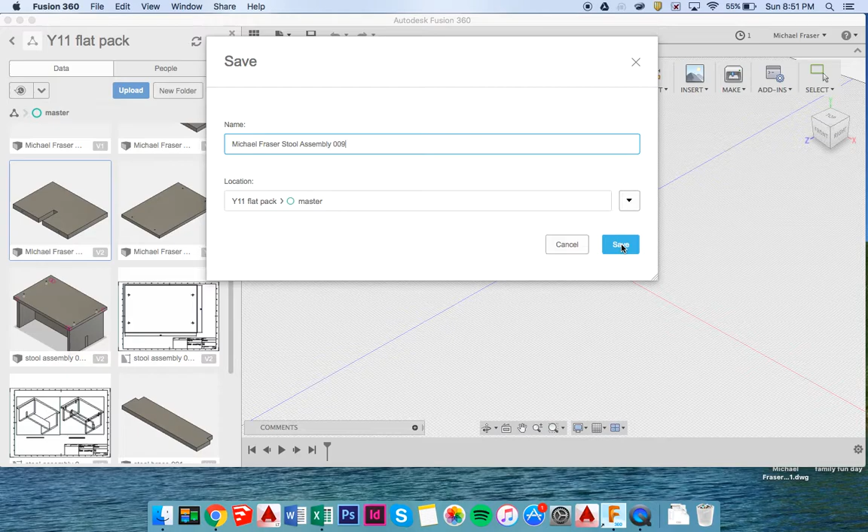I hope you've been using the naming conventions properly, because that's going to make everything a lot easier when we come to our assembly. You'll see I'm up to my 9th go at this. Every time I do it there's a little problem, so it gives you an indication that it's not really straightforward. There's certainly a few little tricks that you need to learn along the way.

So we're going to start by dragging the stool top in, but rather than drag it, we're going to two-finger click and go insert into current design. If you drag it in, it seems to put a lot of load on your computer and on your internet connection as well.

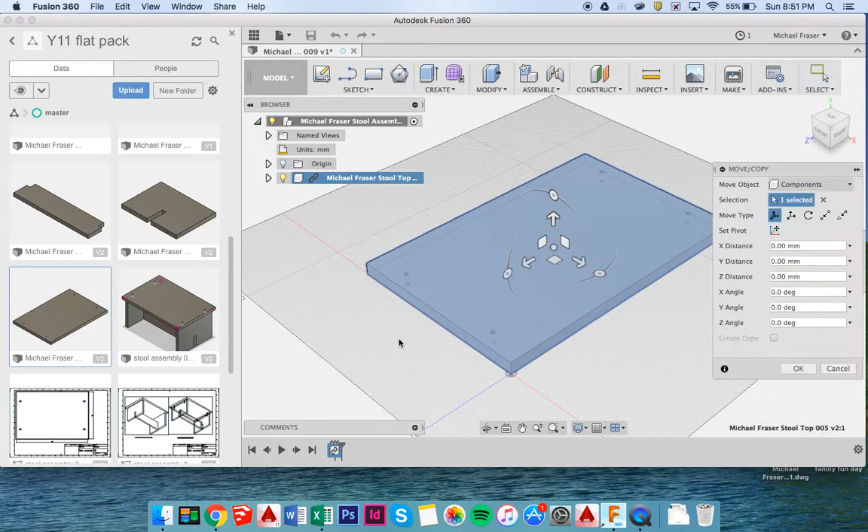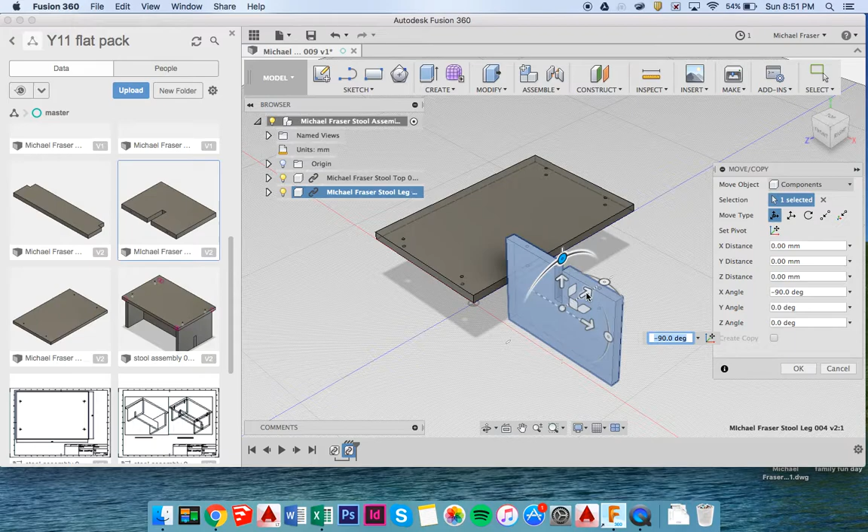So we've got that in there, and now we're going to insert the leg into the drawing as well. And before we try and join those together, we're going to rotate the leg into a better position. Need a good spacing between those drawings because we need to be able to see in there before we make the joint.

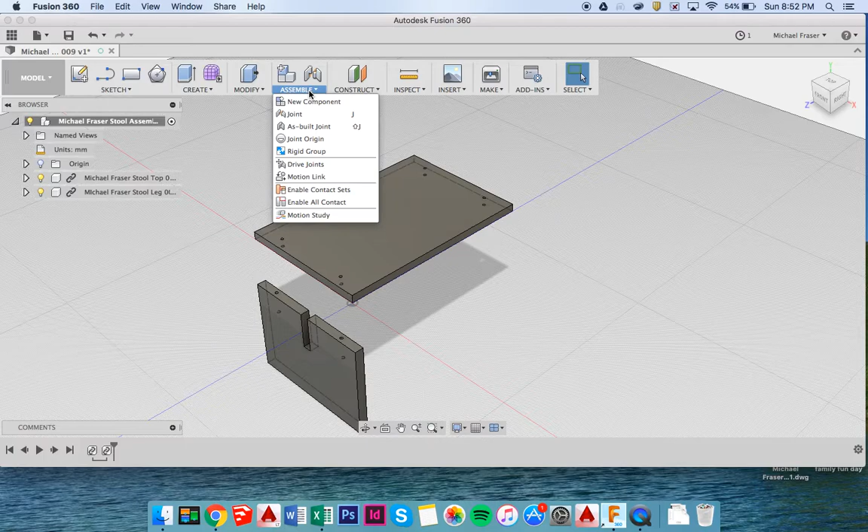And now we're going to join. We'll just hide this away so we've got a bit more screen. And we're going to go to Assemble, Joint. Again, we've got a shortcut key there, J, so click on J.

And we're going to zoom in. We're going to be joining this hole with the bottom of this hole over here. So we're zooming in here. And this is what we want to join.

And you can see the slight difference between these selections. If you join there, that's the side of the circle, and that is the middle of the circle. You definitely want to click on the middle of the circle here. So be very careful to make sure you select that accurately. It's the most common place you'll make your mistake.

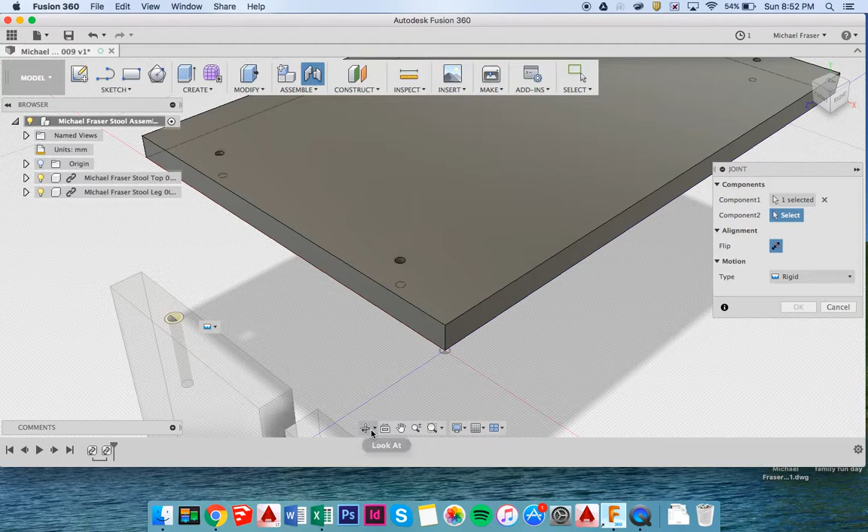And then we need to select the underside of this circle here, so we use our orbit tool. We roll in underneath there. And I'm really going to zoom in, because it's so easy to make a mistake with this.

I'm going to press escape from the orbit tool, and there's the center of the circle. You can see you can also get the cylinder, the side of the circle, the center of the circle, and the cylinder. So again, we need to make sure we carefully select the center of the circle.

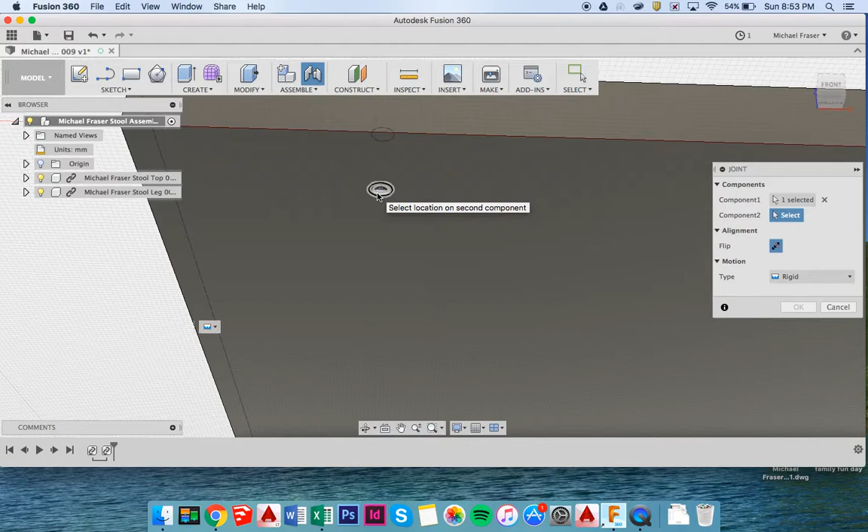And that's going to snap those in. That's worked really well. You can see the cylinder for the hole lines up perfectly all the way through there, so we've got a good join. I'm going to click OK, and let's just scroll out of there. That looks like a good assembly.

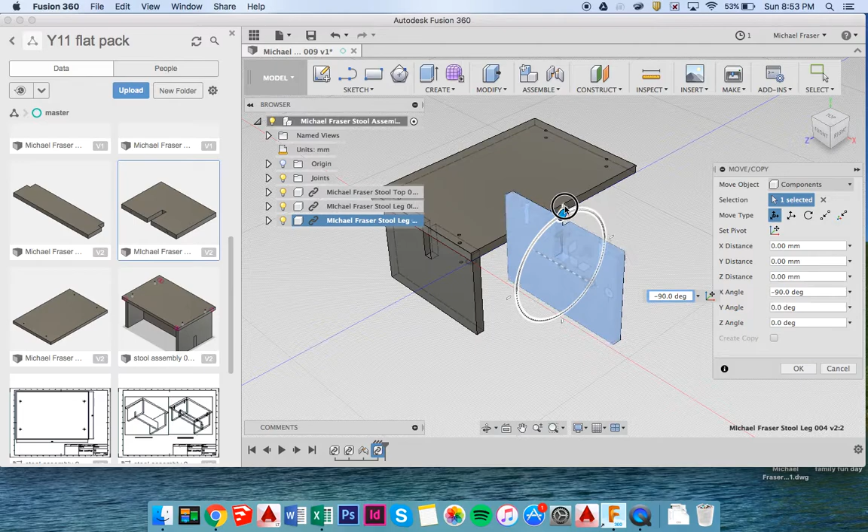We're going to insert the leg again for the other half. Again, we can rotate it and move it.

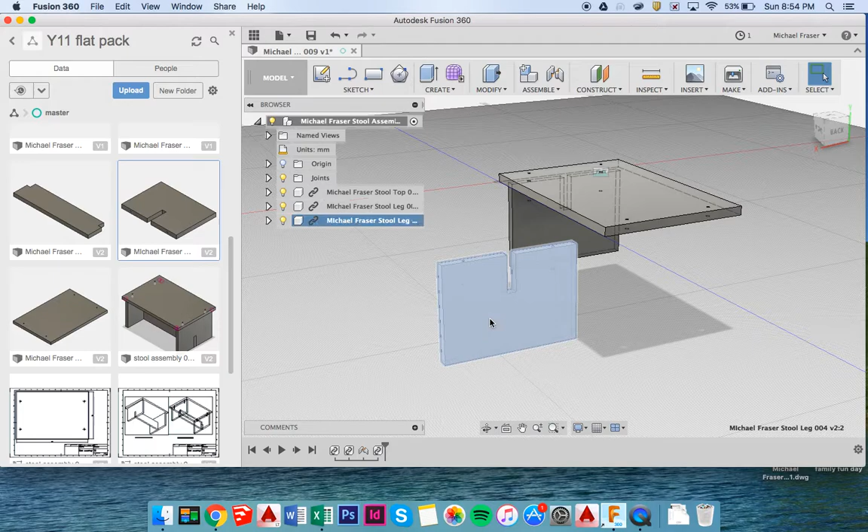Now you may have a problem where, for instance like that, your leg's not really in the best position before you start to do your join. So you can triple click on your leg, 1, 2, 3, and then a two-finger click, and that brings up this menu here which gives you the option to move. And again, these toggles will come back, and we can use that to slide our leg into a better position.

Okay, and now we're going to create our second joint, so J for joint.

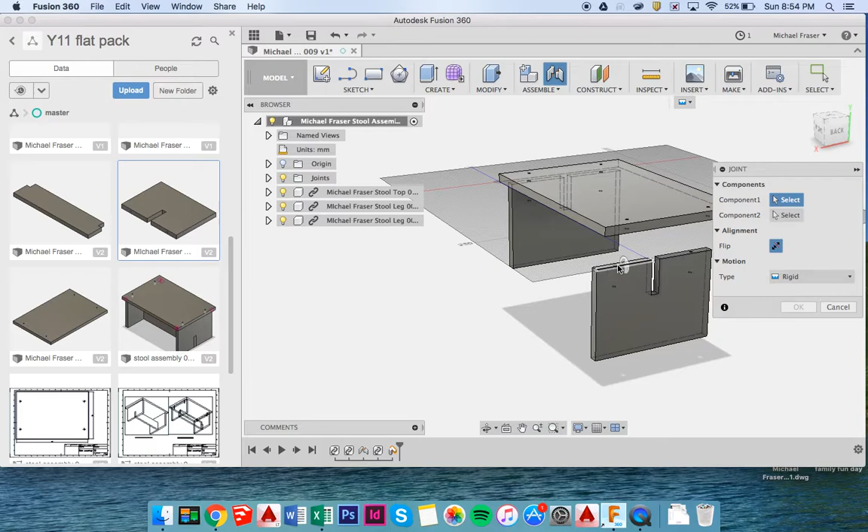We're going to capture that position before we go any further. And this is the second trick you need to be really aware of, as well as selecting the correct part of your drawing.

When you're creating a join, the first surface that you select is the surface that moves. So I'm going to select this one first, and that's going to make the leg move up to the stool top. If I'd selected it the other way around, and selected the stool top first, the stool top would move down to the leg. The problem with that is the leg would stay in the same place and be left floating in the sky.

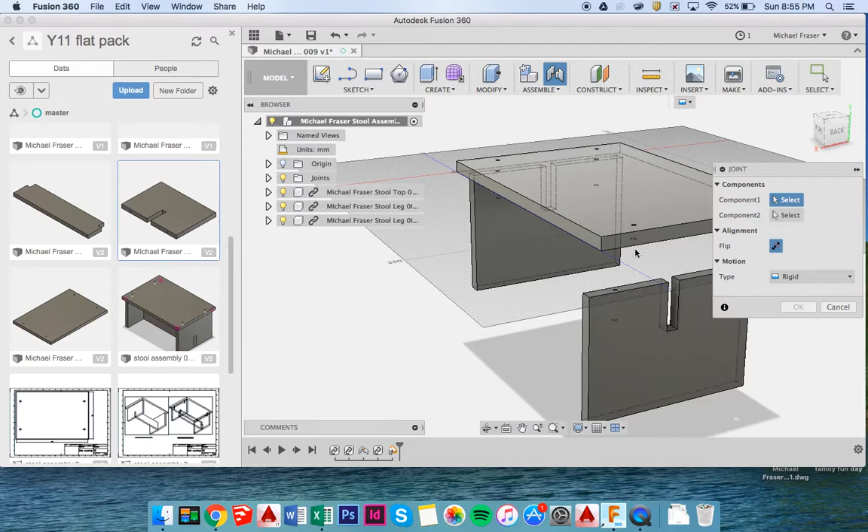So we've got to select the piece we want to move first. We select this, and that's going to cause this part to move up to here. It's one trick that's really quite important with your joining.

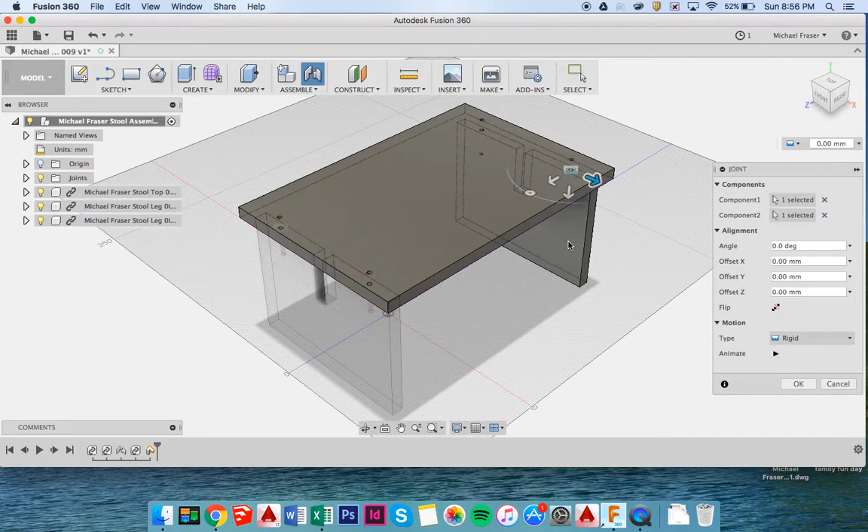Again, we're zooming right in so we can make sure we get exactly in the center of that circle, selecting the surface we want to move first, and then rotating around. Let's pack that away again so we've got a bit more space. Rotating around and zooming in. There we go. And there, we've got a nice assembly there. We'll zoom out so we can see what's going on. Okay, that looks good, both of those are aligned nicely.

Click OK to lock everything down. Bring back your data panel, and the last piece we want to bring in is the brace. So we two-finger click on that, and insert it into the design.

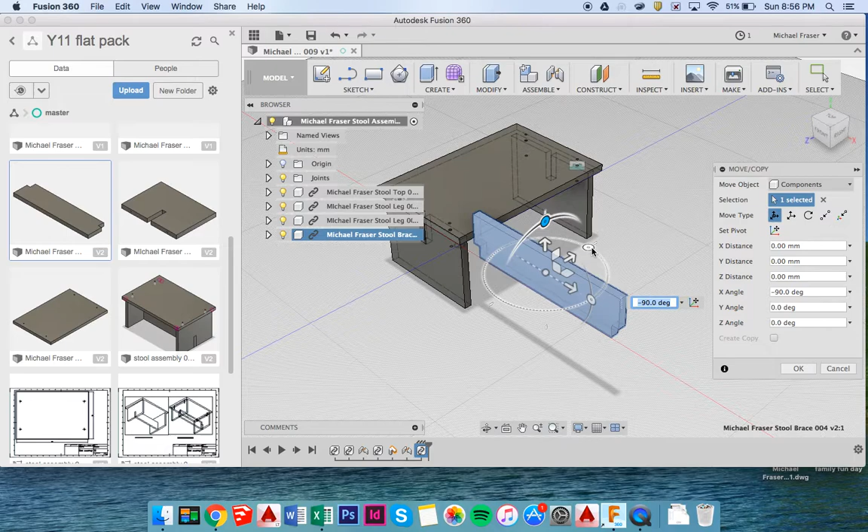And again, we want to move this around. It's going to move 90 degrees that way, 90 degrees that way. That's probably going to do for our positioning for this.

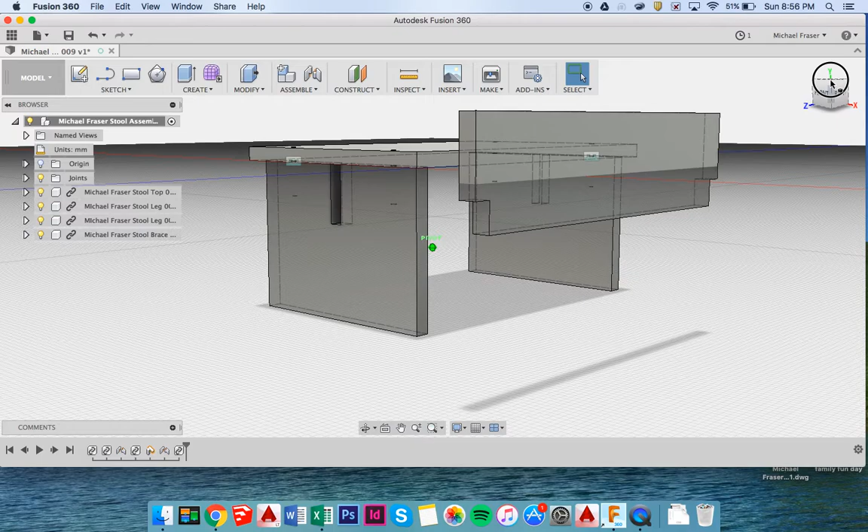Let's hide our panel away again, and we can zoom in here. Now what we want to do with this is join this whole surface in the bottom of the join to that surface in there. So again, it's going to be important that we carefully select our surfaces.

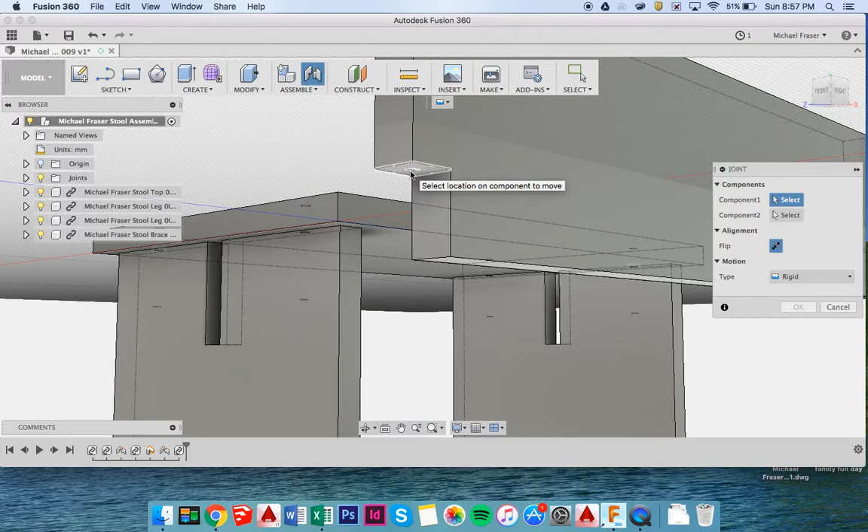So J for joint. We're hovering in here and zooming in a little more. See how you can select all the edges and the circles come up facing all sorts of different directions, but this is the one we want, where the whole surface is selected and the circle is right in the middle there.

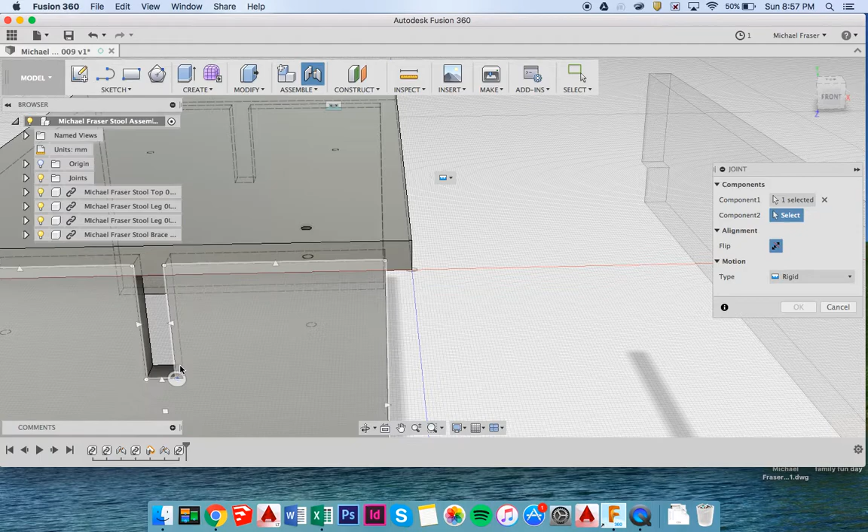So we're going to select that. This is the part we move, so we select this part first, and then we're going to move it over to here. Again, a bit of clever orbiting needed to get you into position, then press escape, and we're going to just hover in there. Again, you can see we could get all these different edges and corners, but we want that flat surface with the circle in the middle.

Click down, and that has come in and perfectly joined in there, and you can see at the other end the join is perfect as well. So that's a really successful assembly for us.

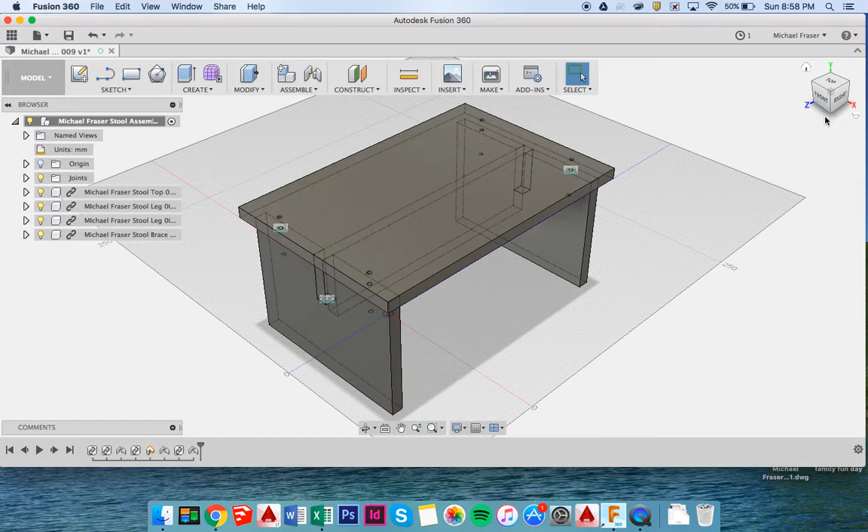Let's move back out to the home view, and we'll just scroll around that to check that our assembly looks good. You can see there's no gaps anywhere, everything's pulled nice and tightly together. So that's what your final assembly should look like. Once you've done that, remember to save it.

And that's the end of that drawing. The next thing we're going to do is convert that drawing into a working drawing or a technical drawing, and you'll be able to print that drawing out on A3 and use it for your skills exercise. So in your 5th tutorial we'll move on to that, but that's the end of this session. Thank you.